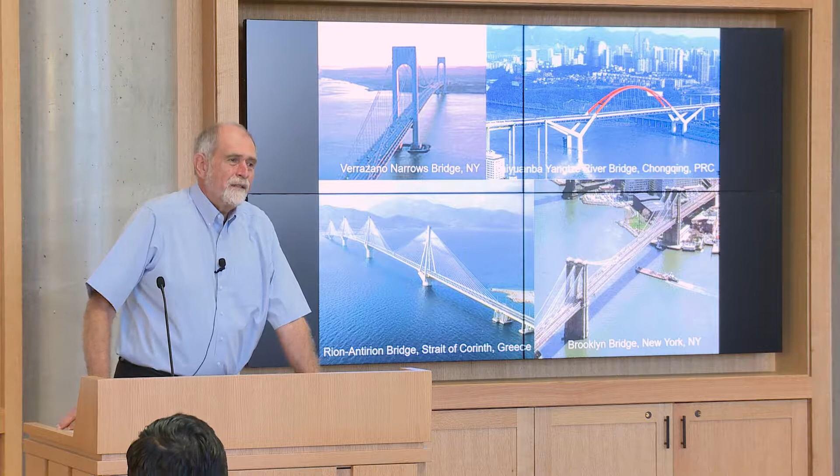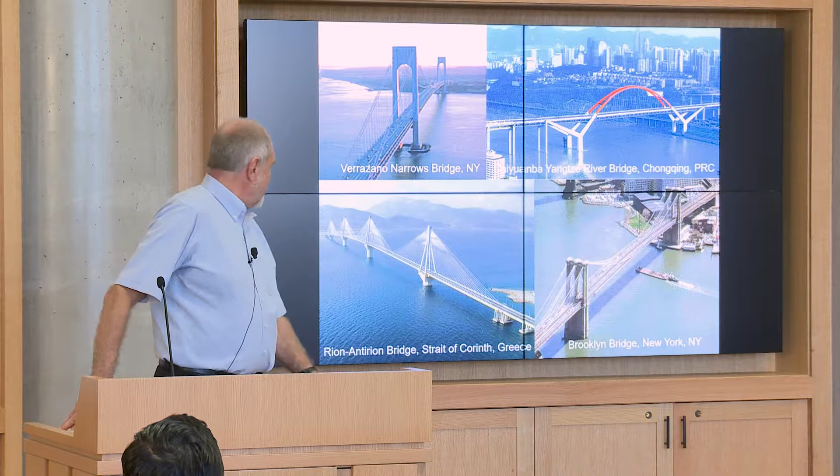So very quickly, I'm a structural engineer, I'm a bridge engineer, I'm a bridge designer. This is one of my bridges in Chongqing in China. But I have done my work all over the world. These are not all bridges I designed - I'm not that old, okay - like the Brooklyn Bridge down there. But I was the chair of the review panel that was put together to strengthen the Brooklyn Bridge against earthquakes and against terrorist attacks. And the same for the Verrazano Narrows Bridge on the upper left. And then we'll talk about the Rion-Antirion Bridge a little bit later, but I do bridge structures around the world, and in particular when there are seismic or terrorist issues.

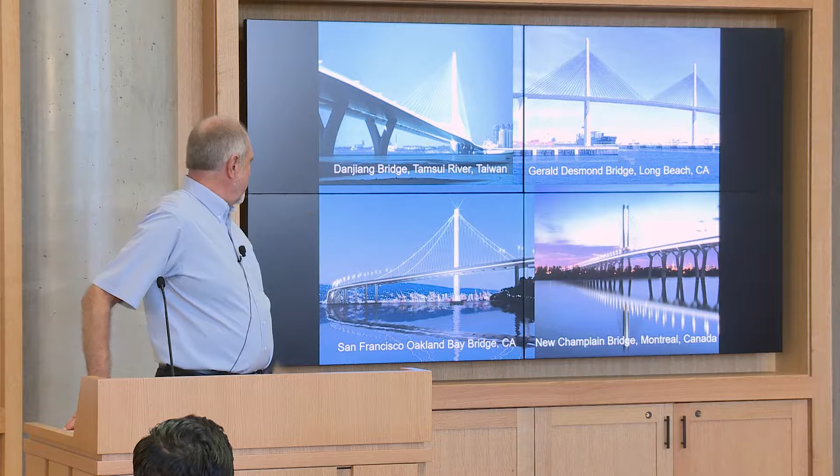Most recently, these are some of the bridges I'm still currently involved with. You can see all over the world in Taiwan, Long Beach, San Francisco, Canada. So this is what I do.

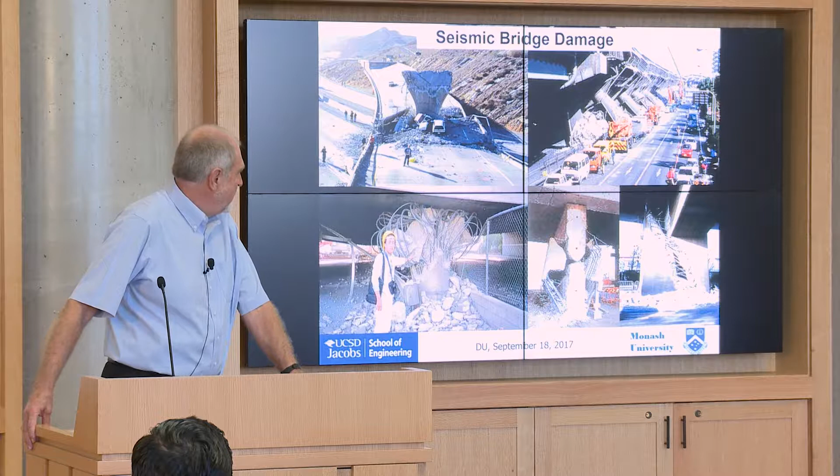Unfortunately, in natural disasters, our bridges can look like this. This is what I mean by designing against these kind of loadings that bring our structures to failure. On the left is 1994, the Northridge earthquake in Los Angeles. On the right is exactly 1 year later, 1995, the Kobe earthquake in Japan.

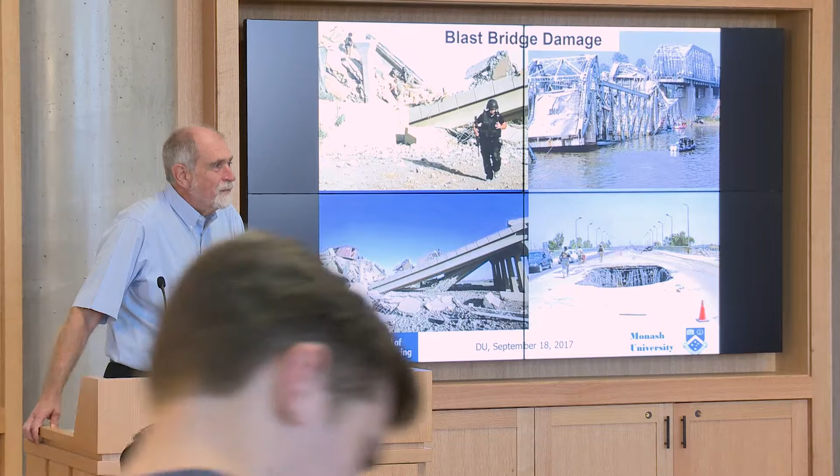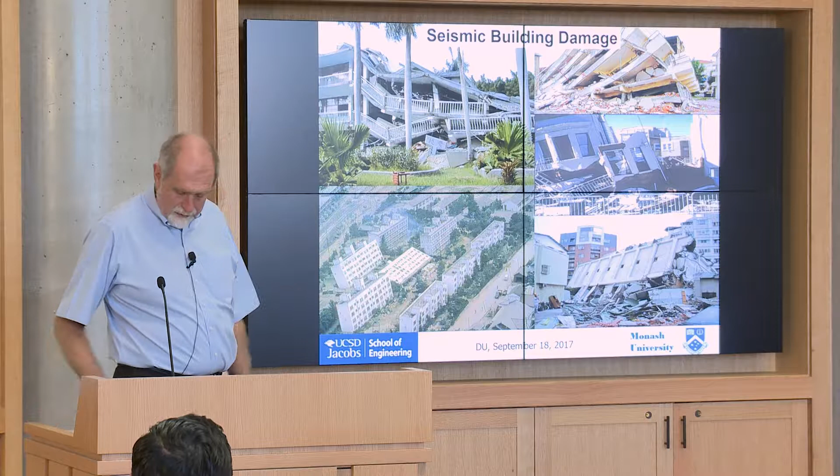We can also see the same kind of failure from blast loading, from terrorist attacks on our bridge structures. We can see it on our buildings from earthquakes. These are building failures from different earthquakes, but we can also see it from terrorist attacks.

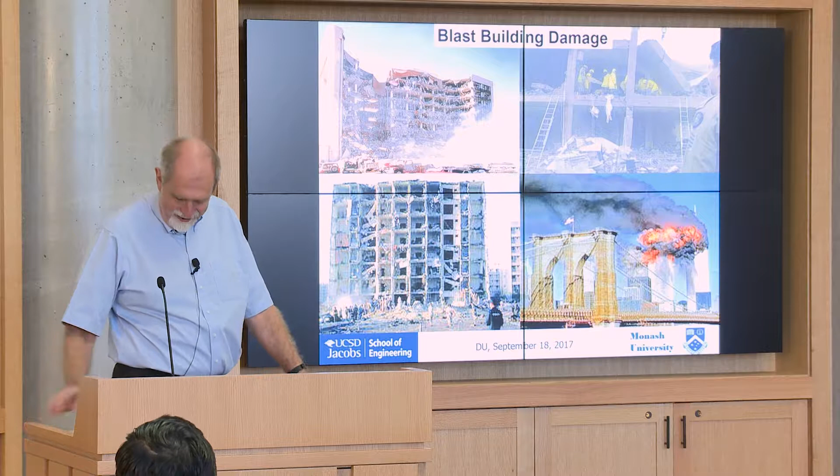This is really what I'd like to talk about today: how can we design for loads which we don't know what they really are? Ideally we have to decouple the response of the structure from the loading. That would be best, if any earthquake, blast load, or hurricane could be withstood, but unfortunately that's not the case. We can never do that.

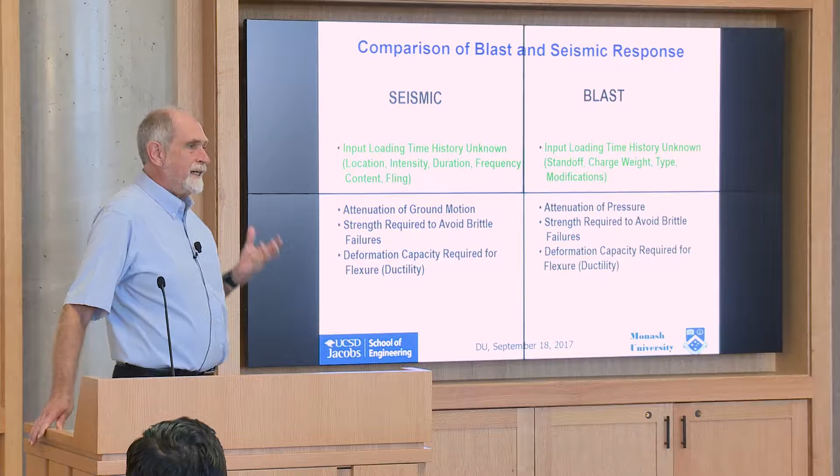Looking at the two load cases I want to talk about, seismic and blast, when we look at the input we need for design, the loading time history, we don't know the location of the earthquake, the intensity, the duration of shaking, the frequency content, or any special characteristics the earthquake may have. Same with blast loads, we don't know the standoff, the distance from the explosive to the structure.

We don't know the charge weight, how big the explosive is. We don't know the type, is it TNT, is it C4? We don't know if it's the modified explosives which we see on television regularly.

But I could just as well put up a slide with hurricane loads, because we don't know how far away from the epicenter we will be with our structure. We don't know beforehand what the intensity will be when we design, or the wind speeds which will hit our structure. So it's exactly the same thing.

For all these load cases, there's an attenuation of the effect. The best thing against earthquakes is to be far away, like here in Colorado. The further you are from the epicenter, the safer you are. In blast loads too, there's attenuation: when you're close you feel the full effect, when far away it attenuates. Hurricanes too, if you're not at the eye, it's not as bad when you're 100 miles away.

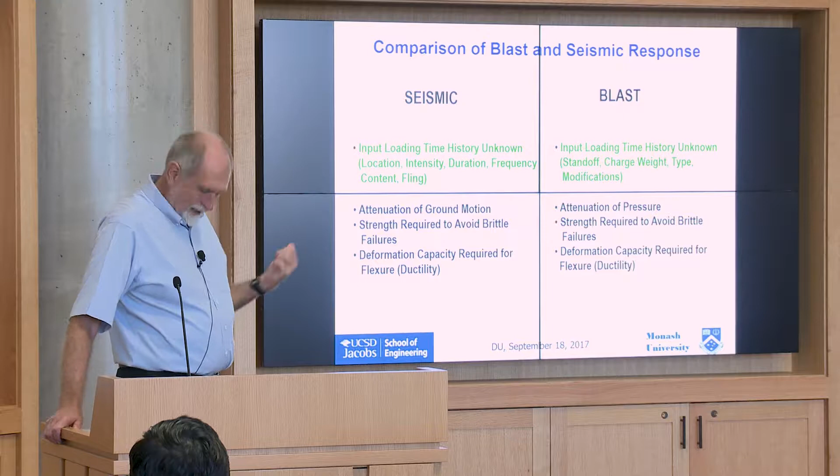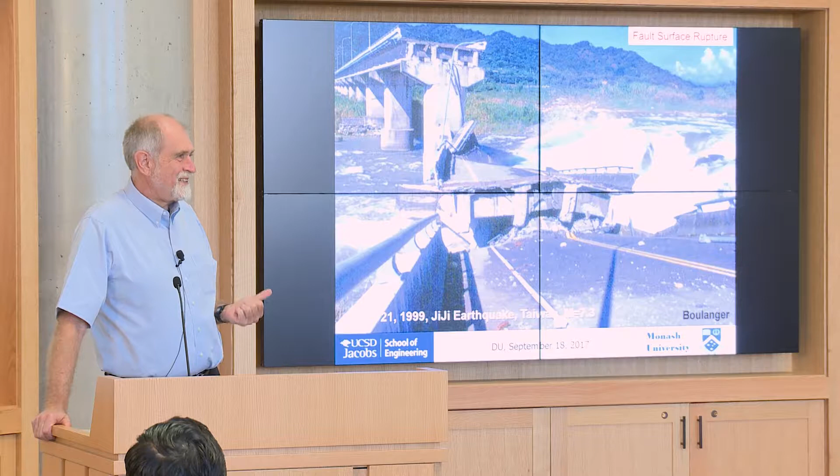But to design for these events, the best way is to look back and see what has happened in the past, because that's really the best way for us to learn. But it's a little bit like predicting the weather from yesterday. We can all do that, because we've experienced it, but predicting tomorrow's weather is more difficult.

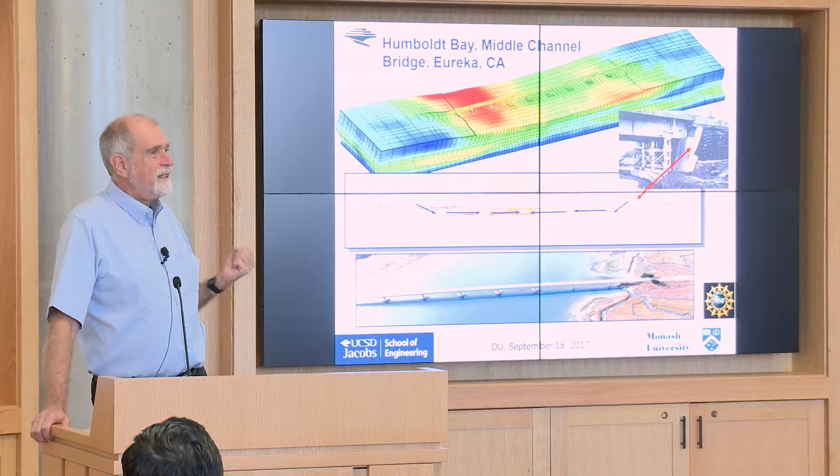You've seen this recently with the hurricanes. They always show on television these different models, the European model, the US model, and then 15 other models, showing the predictions. That's really what half of our business is about, trying to predict what happens in these known, unknown events.

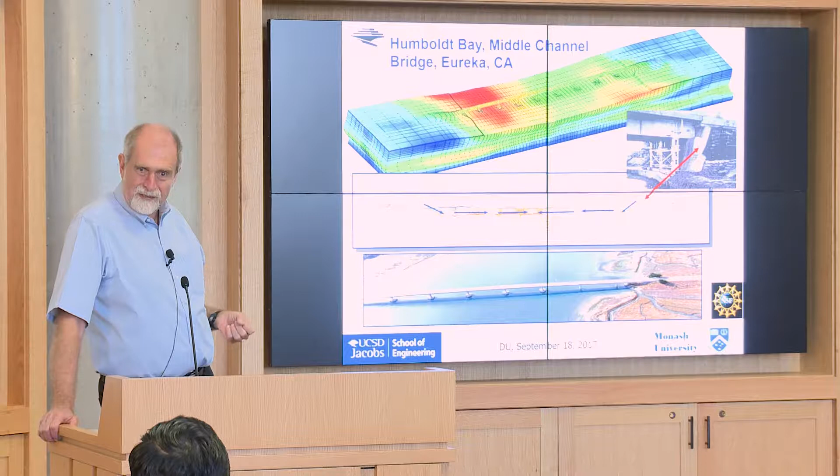So we do a lot of modeling. For those who deal with structural analysis and mechanics, it's a finite element mesh using elements for the whole soil condition, then the bridge structure is all modeled. We can send earthquakes through our analytical model, not just one but many different ones. That's how these hurricane models are also put together, sending all kinds of different assumptions through to get the most probable response.

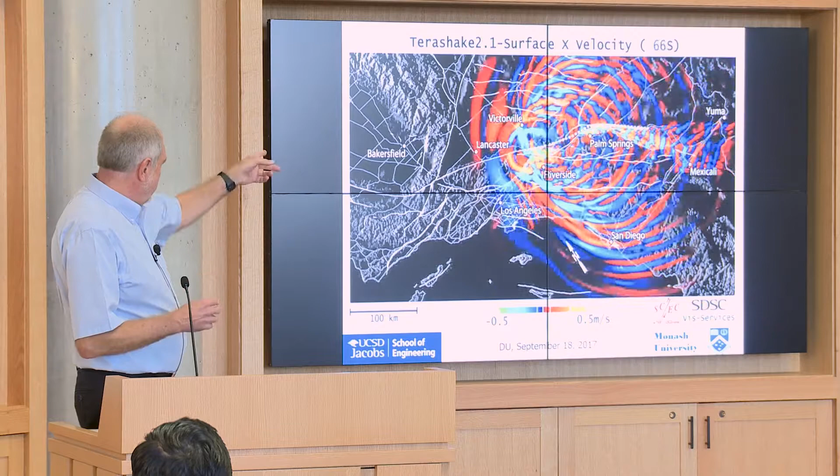So you can see here the intensity of ground shaking. These are the kind of things we can model these days. You can see the shaking spreading out from the San Andreas fault, and even after 80 seconds, after 100 seconds, you can still feel the ground shaking in the Salton Sea and in the Los Angeles basin.

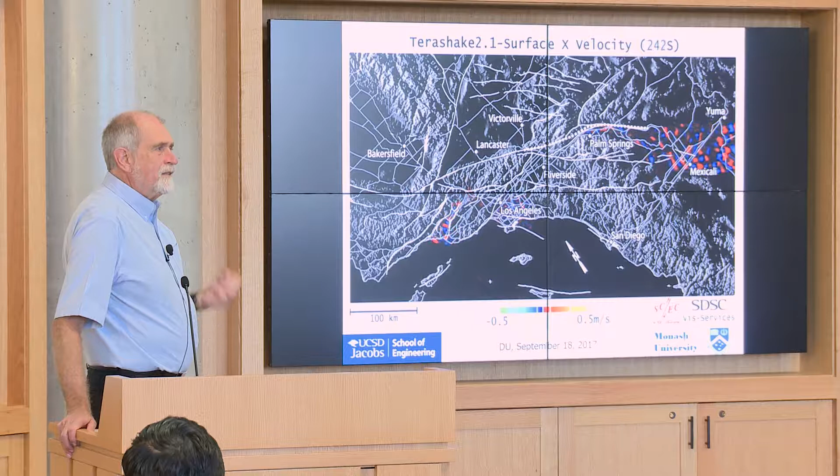This is very soft soil - like a bowl of jelly, the entire Los Angeles basin. Then in the San Fernando Valley, even 200 seconds after the earthquake, you still see ground shaking. These are the kind of models we can put together these days, and then we use that shaking input as the input into our structures to do the structural design.

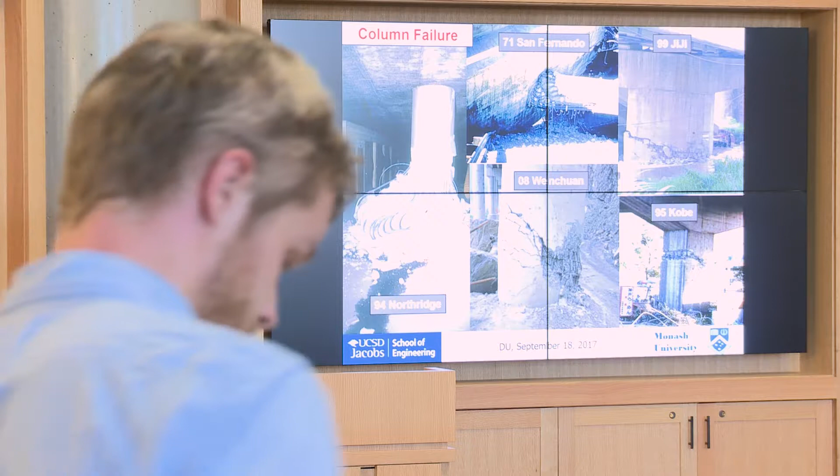So for example, bridge columns - this is where we see most of the damage in bridges in earthquakes. It doesn't matter when and where: San Fernando '71, '94 Northridge, '95 Kobe in Japan, '08 Wenchuan in China, '99 the Chi-Chi earthquake in Taiwan. The earthquake always finds the weak spot in our structures, and then the structures fail.

You can see here, for example, that all these columns have a lot of reinforcement along the column length and very little reinforcement horizontally, so it doesn't confine the concrete. We know now that our columns are susceptible to that. Before '71 San Fernando, we really didn't know that. So this is what we learned from past earthquakes.

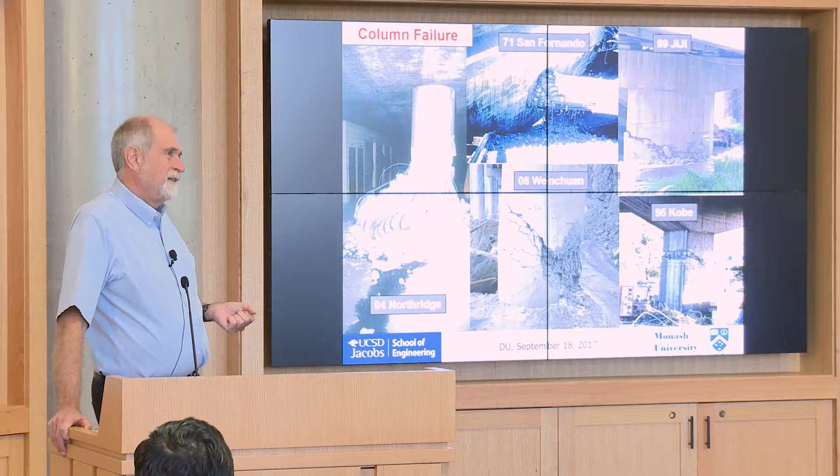So what can we do to our existing structures? We cannot just replace our whole bridge inventory from today to tomorrow, because we know that the bridges are not designed the way they should be. So we have to go through retrofit programs and retrofit our structures.

You can see here, in California we developed steel jackets which we put around all the concrete columns. When you drive on the freeway in California, you'll see steel jackets around all the columns, because that provides the horizontal reinforcement which we didn't put in the columns in the first place. We can do a lot of validation first in the laboratory - you see on the left a test in a laboratory on a full-scale shorter column.

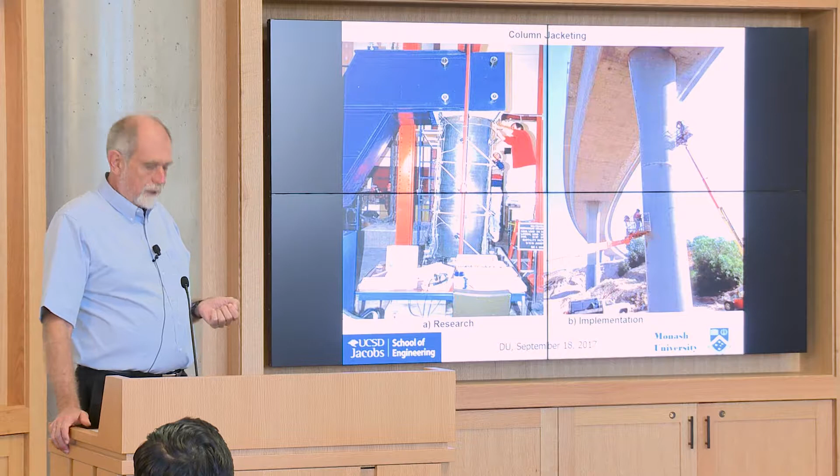Really this is what I want to talk about, because in the end it's not just the prediction, but the validation of the assumptions which we use in our analytical models. That's key for us to have meaningful predictions. For that we would like to have laboratories where we can test our structures full scale.

So we built in San Diego, at UC San Diego, the Powell Structural Research Laboratories. This was the first lab we built where we can test full-scale buildings up to 5 stories tall and bridges over 100 feet long, full scale in the laboratory. We have a 50-foot reaction wall on the back, a 50-foot reaction wall on the side, and then we use large hydraulic actuators to push the building into the deformation state it would see in an earthquake.

Okay, and then we measure the forces required to do that. We measure strains and all kinds of things. Typically, every structure has over 1,000 sensors put in, and those are the measurements we use then to calibrate our analytical models.

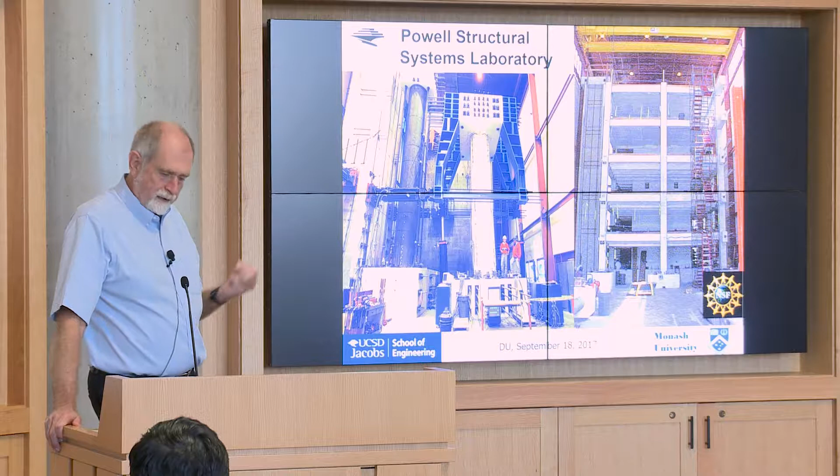So to do large-scale testing, there are three key principles which we need to follow. One, it should be done under controlled laboratory conditions, that we really get quality data. In order for us to validate analytical models, we need to have clean data, and so we need to measure parameters which we can then adjust in our analytical model.

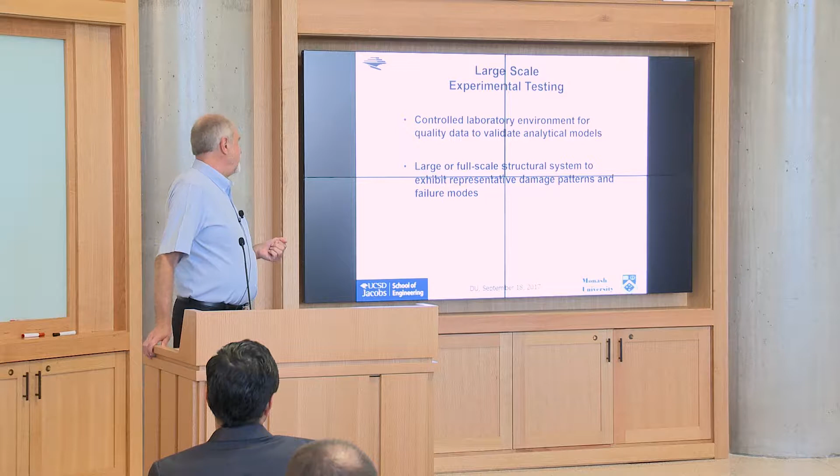The next thing we need to do is we need to test either at large scale or ideally at full scale, because that's the only way to get realistic damage patterns and failure modes. A lot of times we see structures being scaled down to little scale models, and they're being put on a shake table and sent an earthquake through, but you do not get the correct damage patterns and not the correct failure modes.

So, for example, concrete structures, you can only scale a certain amount, maybe a third or a quarter scale. Anything less than that, the reinforcement isn't there anymore. The aggregates in the concrete are getting too small, so you get completely different behavior. So you should test full scale, ideally.

And then the test should be performed under realistic load simulations with test protocols which simulate the actual demands. For example, testing bridge columns in the laboratory. Looking around the world, and we started out that way too in San Diego, you have a column, full scale, and you're happy that you can do that, and then you take the column, push and pull, push and pull, with larger displacements until the column fails.

And guess what? It's like the coat hanger effect. When you have a metal coat hanger, bend it back and forth, low cycle fatigue, eventually it breaks. We have never seen low cycle fatigue in a real earthquake, because you may get one or two large cycles, but not 50 or 100. And so then the test in the laboratory becomes meaningless, when you test with load input that doesn't correspond to the real world.

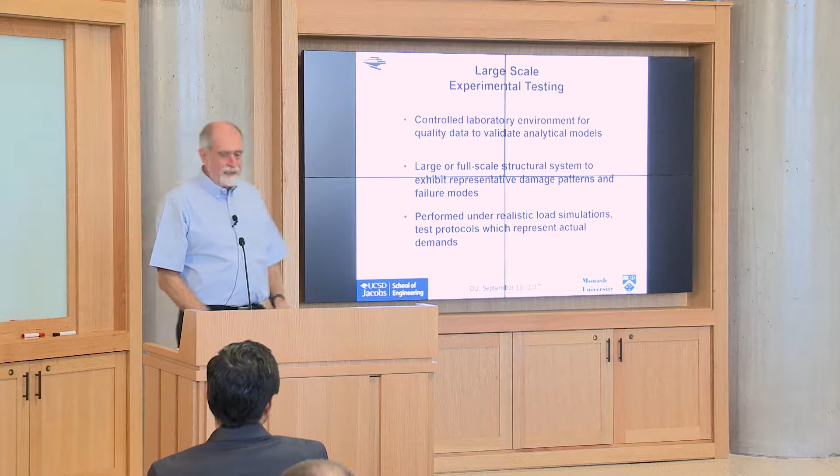So when you take these three theses and develop a research program around it, what that means is that you need a shake table where you can put full-scale structures, send real earthquake ground motions through. So we built in San Diego the world's first and only outdoor shake table, where we can put structures of 2,000-ton payload on that shake table. And we've tested 5-story buildings, 6-story buildings, 7-story buildings on the table, and we've reached about a third of the capacity of the table, so we can still test much, much bigger structures.

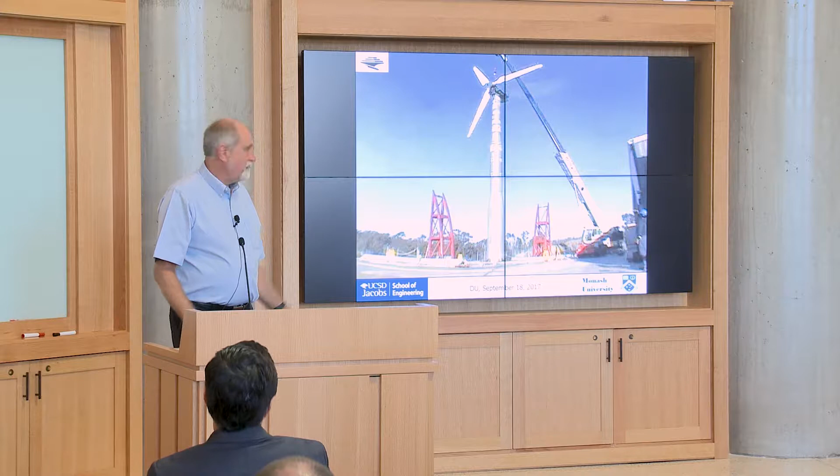So, for example, one of the first structures we tested was a windmill, 30 meters tall. When you test that structure, it's very easy to lift it onto the table with a big crane, bolt it down on the table, and send earthquakes through it. You can't do that at any other facility worldwide. Yes, we have big shake tables, but they're indoors, and you can never put a full-scale structure on these tables.

Or here, a 3-story parking structure. That's a precast concrete parking structure. And you can see our students have a lot of fun in San Diego. Or here, a 5-story reinforced concrete shear wall.

What happened to the sound? Well, doesn't matter. So you can see here how the building is shaking, and then when you take close-ups with the camera, you can see how every crack opens and closes, like the building is breathing under the earthquake load.

Let's take a look at bridges. This is the Coronado Bridge in San Diego, and it was built in the late 60s, '68, '69, clearly to seismic standards which are different from the ones we have today. And then when we went back to our seismologists in terms of what we can expect in the Coronado Bay in terms of earthquakes, they told us there's something called the Silver Strand Fault.

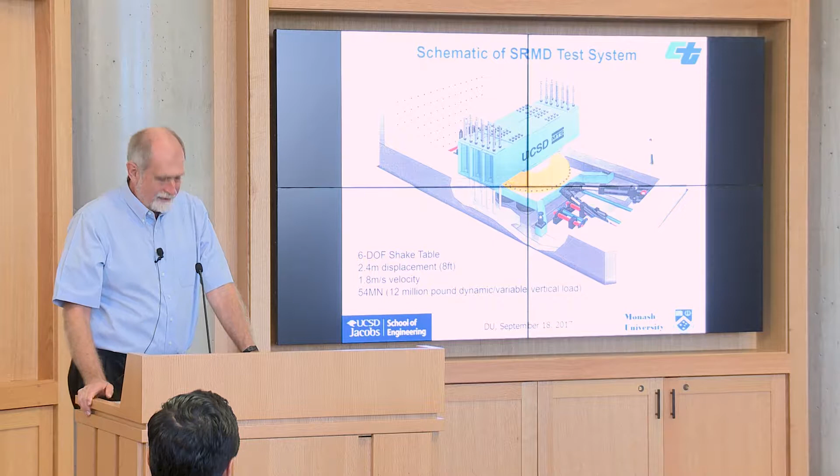In order to retrofit the bridge like this, Caltrans said, this is a great idea, but how do we know it's working? So we had to design a separate laboratory for these kinds of tests, namely a seismic response modification device system that can take these devices through very large displacements, 8-foot displacements, with loads up to 12 million pounds on these bearings. Here's a schematic of the test setup, and this is one of these bearings in the test setup.

So you saw 100% deformations, namely the height of the bearing applied horizontally. These bearings can go through 300% deformation before they fail. This is the retrofit of the Coronado Bridge: the earthquake comes and shakes, or even if we have a fault rupture, the pier goes there and shakes over there. This is how we decouple the structural response from the input. So even if we have a bigger earthquake, I'm not worried about it, it will be fine. I don't really care anymore what the earthquake is in San Diego for the Coronado Bridge.

Now we come to the Rion-Antirion Bridge, the world's longest cable-stayed bridge, over 3 kilometers in length. The initial design was that each pier connected the superstructure at the pier, with hinges between the individual spans, but it became a very flexible system. I was responsible for the seismic design of the Rion-Antirion Bridge across the Gulf of Corinth in Greece.

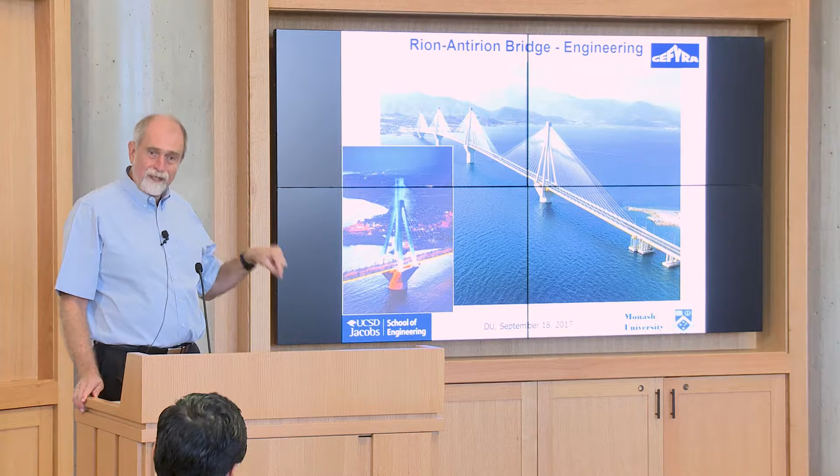Very similar to California, we can expect the same magnitude earthquakes in Greece, and we can also expect fault ruptures and offsets. So the idea was not to isolate the bridge with bearings, but to just hang the bridge from the supports and let it float freely between the towers. The towers have 4 legs, and the bridge is just supported by the cables, not connected to the tower. It's the same idea, just reversed, hanging down, and isolated from the seismic input.

To do that, we connected the whole bridge end to end without expansion joints. Usually you have expansion joints every 300-400 feet—that's what you hear when you drive across a bridge, that ka-thunk sound. Here we needed expansion joints only at the ends of the 3-kilometer-long bridge, with a 1.5 meter expansion joint on each side.

So the whole bridge is free floating end to end, just supported by the cables. But then we put dampers in—like shock absorbers in a car. These are oil-filled dampers which dampen any relative motion between the tower and the bridge superstructure. These huge blue dampers, shock absorbers, were put in the bridge at every pier.

But again, dampers of that size had never been built in the world or tested before. We in San Diego could put them in our seismic response modification device system and test them under simulated seismic loads.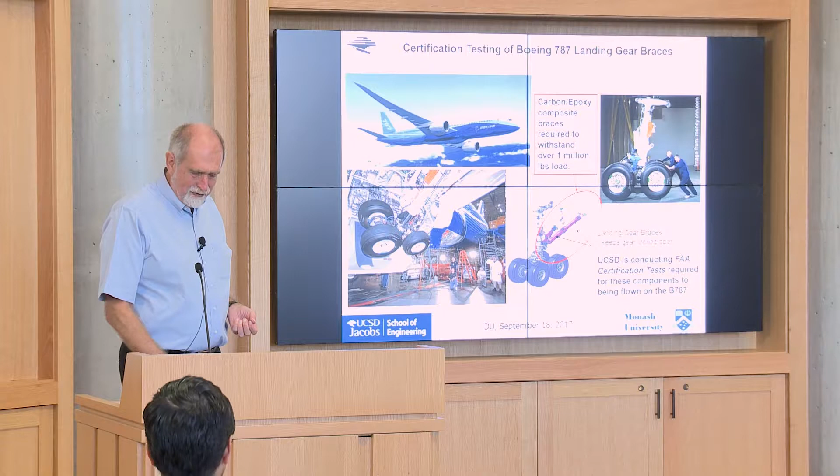Now the other thing we did with that same loading system has nothing to do with bridges, but with the 787 Dreamliner, because it has an all-composite landing gear, carbon composite landing gear. This strut, the landing gear brace, was never tested to failure and couldn't be tested to failure anywhere. So Boeing came to San Diego and asked us to test the landing gear for the 787 Dreamliner. You can see it in the test setup. It performed beautifully—this white element is all carbon composite. It's the first time a landing gear is not built out of steel or high-strength aluminum, but out of carbon composites for weight purposes.

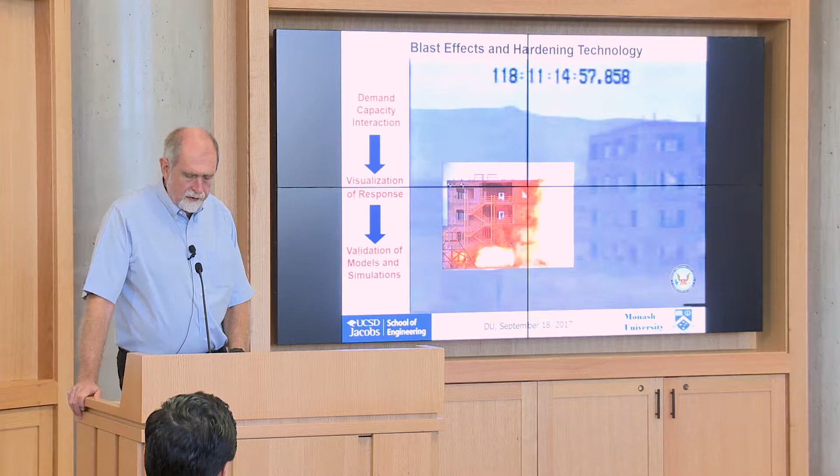Let me now focus on terrorist attacks and blast loading on structures. This work was done with the DTRA, the Defense Threat Reduction Agency. They have a test stand at White Sands in New Mexico, at the Trinity site at Ground Zero. This is where the big test site is, where we can build 4-story full-scale buildings and do real field blast tests to find out how we can strengthen our buildings against blast loads. This was one of the first tests, on a reinforced concrete frame with masonry infill.

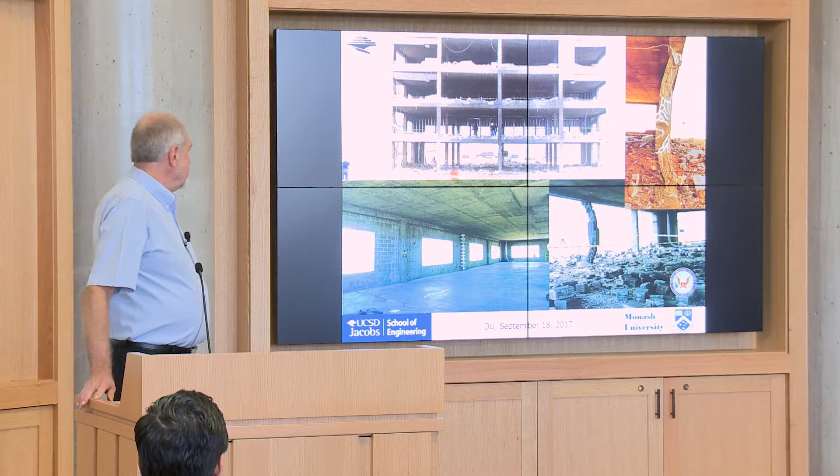You can see the building is still standing. The target was the center column in the middle on the ground floor. You can see how deformed it is in the two right pictures. On the left, you see what the building looked like before the blast load - a concrete frame with masonry wall infills. While the building is still standing, the masonry walls are blown clear through the building. Unfortunately, in this case, even though the building is standing, everybody in the building would be dead.

So we have to think about several things. One, how can we keep the building from collapsing? That column is very close to gone, and when we take out that column completely, the building may collapse. And then, how can we keep these masonry walls in place so they don't fly through the whole building?

So we developed, again in San Diego, hardening systems using carbon fiber wraps around our columns. We developed that first for earthquake loads - just like we put steel jackets on, we can also wrap our columns with carbon. And it worked really fine, and this is why DTRA came to us in San Diego and said, look, you're doing the seismic retrofit, which seems to work really well - can you do the same for blast? And naturally we said, oh sure we can, you know - no idea what we were talking about at the time.

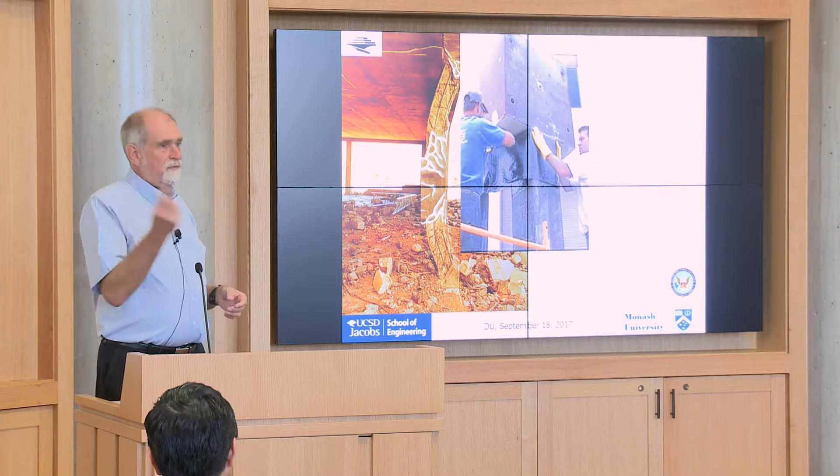So we wrapped that column, that same column - it was rebuilt. The whole building was rebuilt, all the infill walls were put in, and that column was wrapped with carbon fiber. Then the same test with the same charge load was repeated. This is what the column looked like after the test - perfectly straight. You can see just at the very top, the carbon jacket opened up. So that was the first indication that retrofitting or hardening of structures using carbon fiber confinement could be very effective.

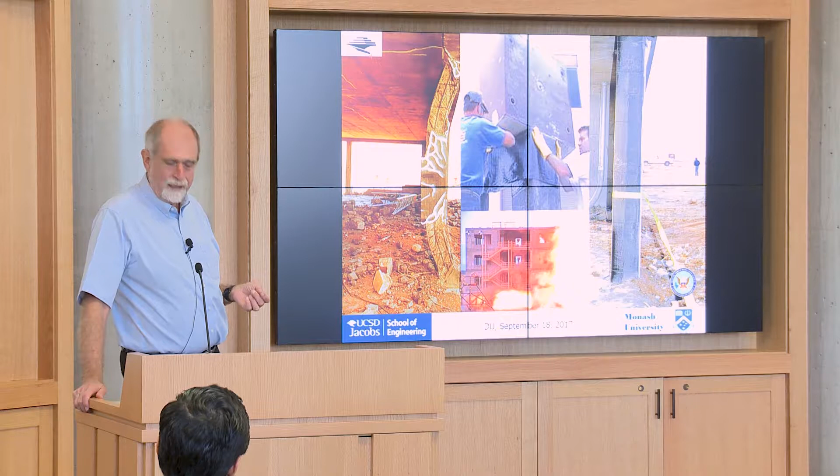At the time, we had no idea how many layers of carbon we needed, so we developed a whole test program. We developed a separate column test stand at Kirtland Air Force Base in Albuquerque, New Mexico. On the left, you see real field blast tests again - a column that has not the retrofit, an as-built column. On the right, a column that has a carbon jacket. Again, the column on the right is almost perfectly straight, while the column on the left shows the typical failure modes we would expect in a blast load case.

We did numerous blast tests at field tests in Albuquerque, but several times we couldn't do the test. You fly out to Albuquerque and then you're told, oh, there's an inversion layer and that's why we cannot test today. Then you fly back, and as soon as you're back in San Diego, they tell you, oh, you can test now. So you have to fly back.

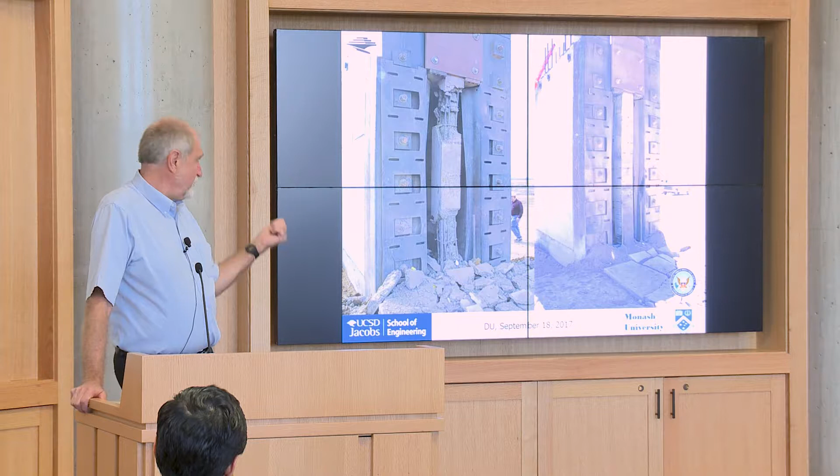And the other time where we went out there was on 9/11. We were in the hotel in Albuquerque when we saw the World Trade Center being hit. Then we went to the Air Force Base, and they already had armored vehicles out there pointing machine guns at you, so we were out of here, back to San Diego.

We wanted to test these columns in San Diego, not in New Mexico. But unfortunately, they didn't allow us to use explosives on campus. And I don't know if they would allow it here at Denver University.

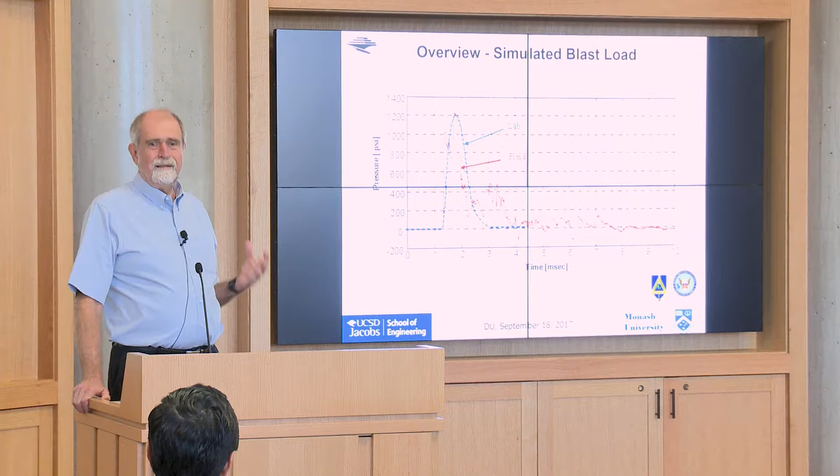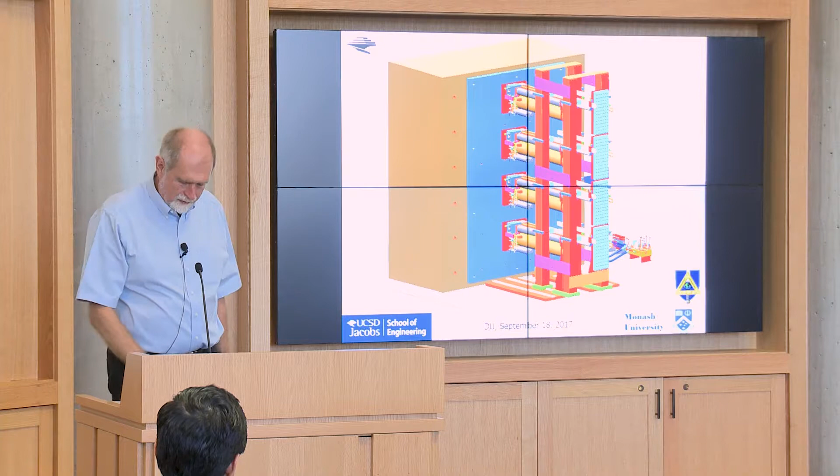So we decided to build a test setup, the world's first blast simulator, where we simulate blast loads in the laboratory using servo-controlled hydraulics instead of real blast loads. Here's the schematic: four servo-controlled hydraulic actuators with red steel plates on front, and turquoise elastomeric pads which impact the column with an impulsive force and then pull immediately back. You can program these actuators to have different force distributions, not just uniform, whatever you want. So this is the first test in that blast simulator.

1, 0. And you can see the same damage patterns which we saw on the columns in the field blast test in Albuquerque.

The real value comes in when we use high-speed photography on these blast tests. In a real blast test, all you see is the fireball. You don't see what happens to your structure. Like in the first blast I showed you on the 4-story building, you just saw the fireball, and then you have to wait until the dust settles to see what happened. For analytical models, we would like to see exactly what happens during the blast, how the cracks develop and how the concrete spalls off.

And when you look at that, yeah, that's working. This is on a masonry wall, unreinforced masonry. The impact was captured with phantom cameras at 20,000 frames per second. Now you can see how every piece is falling apart, and this is how a masonry wall, just like in the 4-story building, would fly through the whole building. We do analytical models to simulate this.

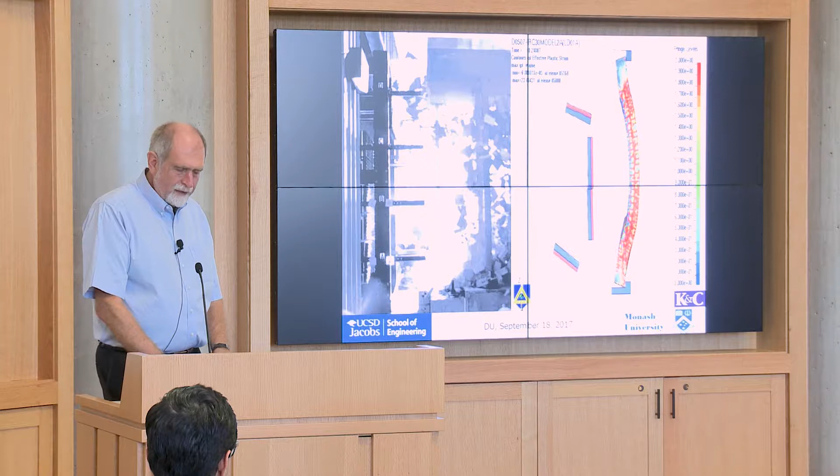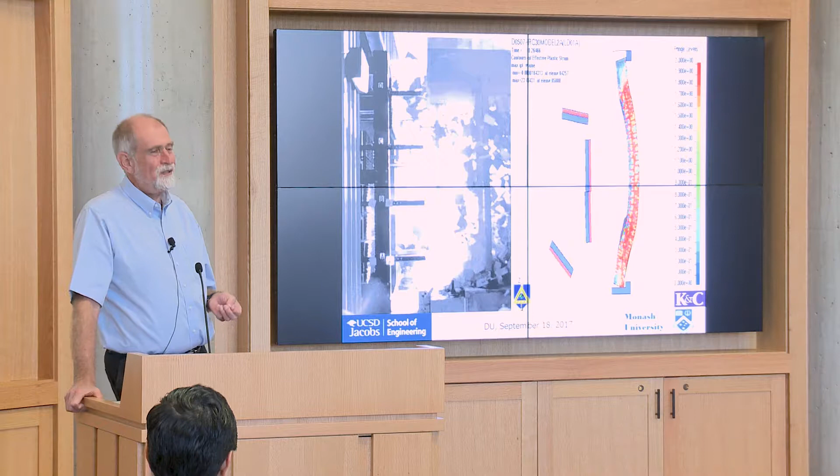Since these are full-scale tests, you never do 10 or 20 of the same kind—you typically do just one. And a one-of-a-kind test is statistically absolutely meaningless, unless you have an analytical model which you use to predict the test and then validate afterwards with the test results. So here you can see the masonry wall.

As a first solution, we sprayed it with polyurea on the back, on the inside. Polyurea is the same stuff you use for truck bed liners, a spray-on foam. There we go—you can see how the wall deforms and the polyurea holds the wall together. But unfortunately, you can see at the top and bottom it also pulls off the ceiling, pulls off the floor, and the whole wall still comes in.

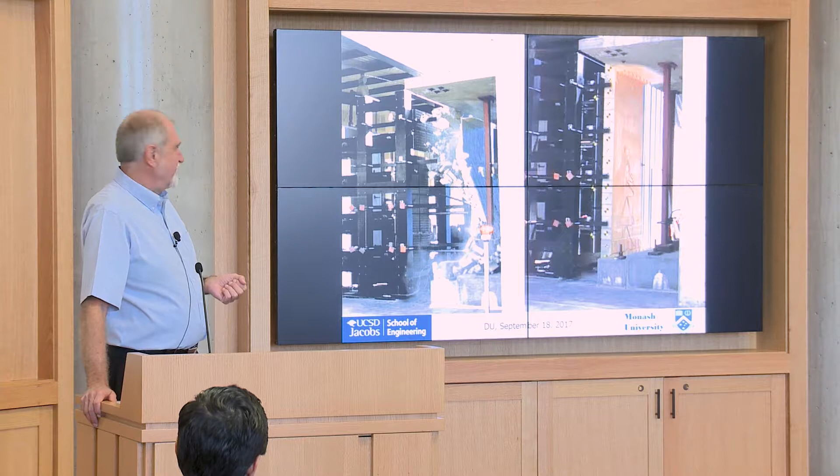And that will definitely kill you when it comes at you as a single piece. We saw the same with hardening of windows. I was involved in hardening a lot of our embassies worldwide, and all the windows in embassies have a mylar film on top, because when the window gets hit with a blast load it would fracture into millions of pieces and hurt you. So we put a mylar film on the window so it stays together. But the problem is it stays together as one big piece and comes flying through the room, definitely killing you.

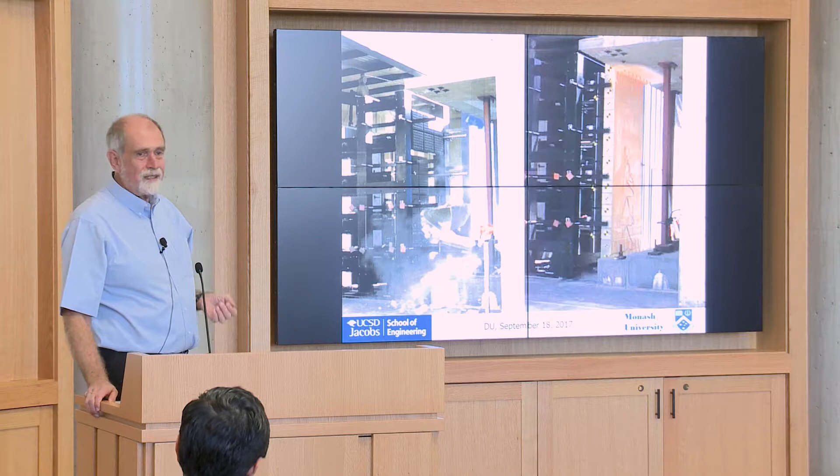So we had to design, for the Defense Threat Reduction Agency, systems that catch the window. For example, you put a steel bar in the middle of the window, and then the window comes and folds around it. Very similarly here, we had to come up with methods to catch the whole wall. So on the right, we have dowels into the ceiling, and then ductile connectors—just steel straps, Simpson ties basically—that elongate when the wall comes in.

There you can see the wall with the ductile connectors at the top. You can see the deformations of the wall, and it stretches at the connectors at the top, but the connectors hold it back. In the picture you see pieces flying around, but in a building you couldn't have that—you'd have the columns and the wall. Overall, the wall stays in place and doesn't fly through the whole building.

Okay, let's look at bridges a little bit more broadly. You can see here the San Francisco Oakland Bay area with the Golden Gate in the back, the Oakland Bay Bridge, and then the new San Francisco Oakland Bay Bridge at the very bottom. That's what I want to focus on a little bit more because it's a unique structure.

Overall, we have 24,000 bridges in California, and we spent in the last 20 years about $16 billion to harden or retrofit our bridges against earthquakes and against terrorist attacks. All these hardening or retrofit technologies are based on the work which we did in our laboratories in San Diego. And then we have something called the Caltrans Seismic Advisory Board.

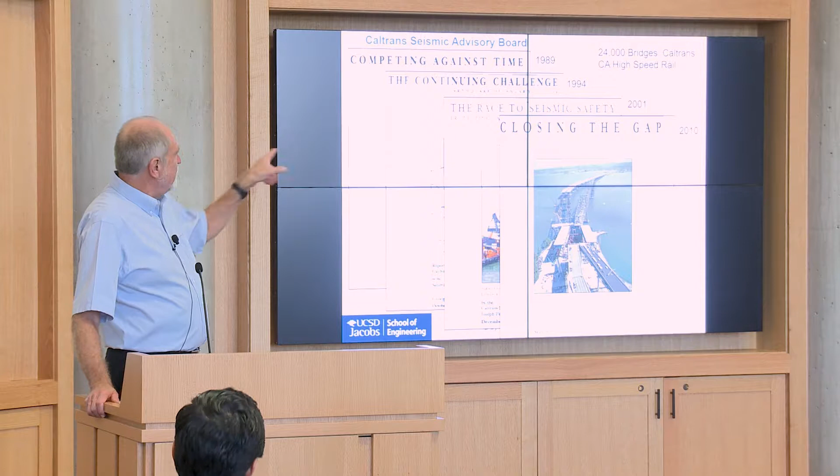After the '89 Loma Prieta earthquake, we wrote a report, Competing Against Time, to assess why bridges failed. Then in '94 Northridge, we had again damage of bridges, when we wrote the report The Continuing Challenge. And then we didn't have any major earthquakes since, and people are becoming complacent. They say, oh, we don't need to worry about it, we don't have a big earthquake. It's just like when you don't have a big hurricane for a few years, then you become complacent. So we wrote interim reports, The Race to Seismic Safety and Closing the Gap, and now we are just working on another report as we speak.

So the San Francisco Oakland Bay Bridge, the new one, is a very interesting structure, namely it's a self-anchored suspension bridge. What does that mean? In a typical suspension bridge, you build the towers, and you build the big anchorages at the end. You put the cable over the towers and anchored at the end, and then you pull the steel segments, the superstructure, up individually and connect it. Here you don't see any big anchorage at the end of the bridge. So it's a self-anchored suspension bridge. The cable coming from the tower wraps around the end of the bridge, and goes up on the other side, and then it's anchored again in the bridge itself.

So the question is, how do you build a self-anchored suspension bridge? We'll come to that a little bit later. But you see in this picture here, this is the reinforcement which we have in some of the piers. You can see now the difference from some of the columns we saw in earthquakes before. Now we put horizontal steel in, confinement steel, so we don't need the steel jacket on the outside, we have it on the inside. But now we have a different problem, because the contractors come back and say, you put so much steel in your design, we cannot build it anymore.

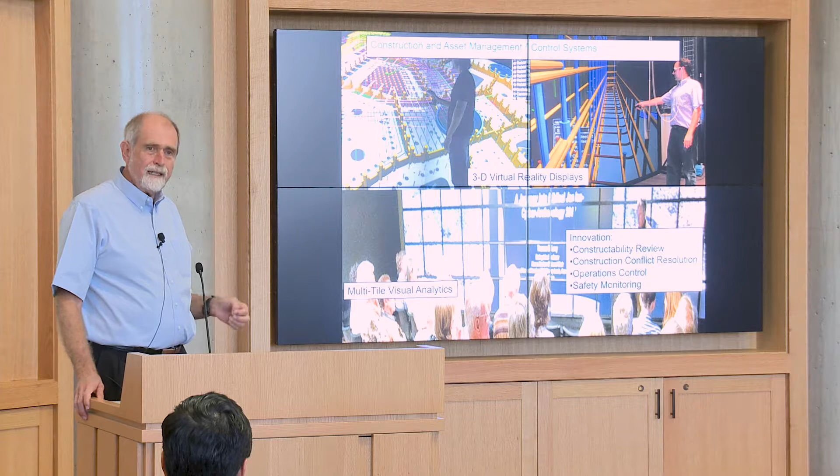But the net result is that your whole bridge deck is under a very large compression force. Namely, the full cable force is anchored in the bridge deck, so it goes through the bridge. So it's a closed force system.

But the problem was that somebody made a comment on television, one of our learned colleagues from academia, that this bridge would collapse because of this big compression force if there's just a small blast load on top of the bridge. If you punch a hole in the bridge, it would buckle and collapse in itself.

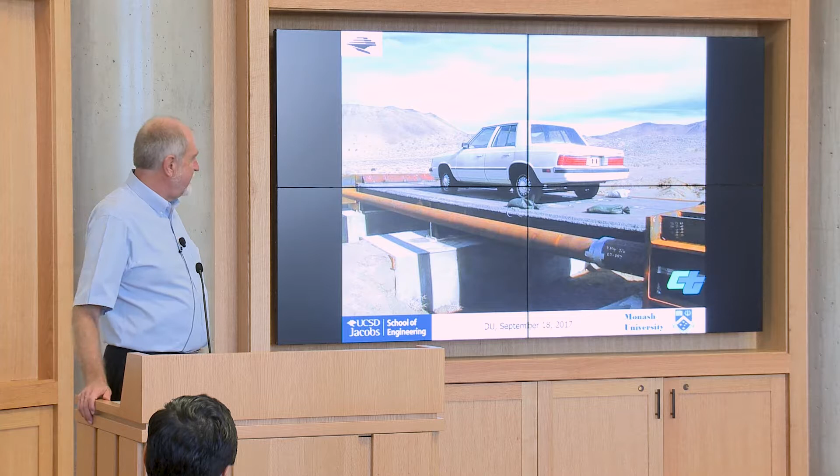We built one, overlaid it with 2 inches of asphalt concrete, just like the real bridge deck. Took it out to China Lake Naval Air Station, pre-stressed it, put the preload on with pre-stressing cables on the side, put a K-car on it, loaded the trunk with 4 boxes of flake TNT, and then tested it. 4, 3, 2, 1, mark.

And that was the result: just a small hole in the bridge deck, about 2.5 to 3 feet in diameter. The deck did not buckle, it was still there.

So the most common explosive threat you can think of -- clearly I can always imagine a bigger explosive, as I said before -- but the most common one would be a car where the trunk is loaded with explosives. So the bridge definitely would not collapse.

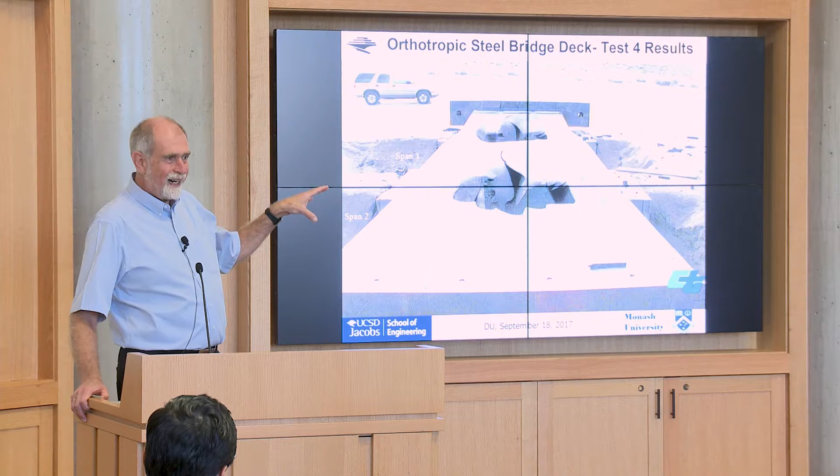So we did another test on the same deck. Two tests in a row, same failure mode. This data is archived at Caltrans. It's not really public knowledge, but they will pull it out when somebody comes and asks them, are you sure there's no danger of terrorist attacks on the Bay Bridge?

We then did further tests on all kinds of different bridge decks, concrete bridge decks, not just the orthotropic steel deck we had. This time we didn't use K-cars anymore -- we didn't have enough cars -- so we just built a little stand with the same standoff distance as would be in a trunk, and used C4 or plastic explosives, with different charges of 25, 50, and 100 pounds.

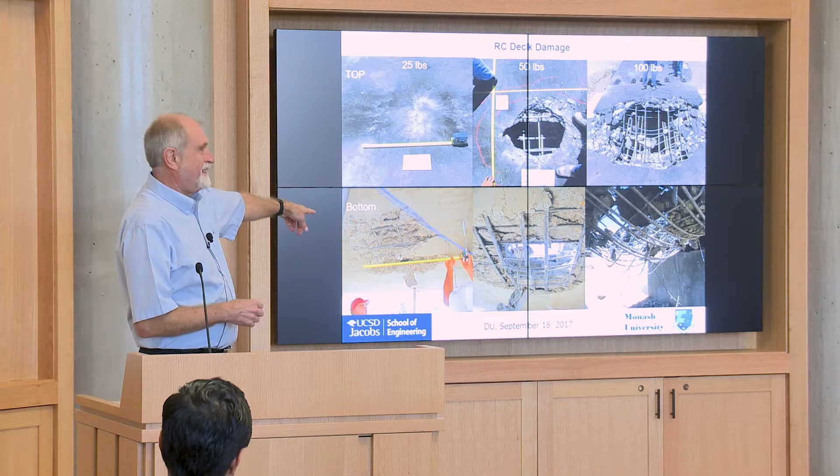You can see the damage here, and the interesting thing for those who don't know concrete behavior is that at the top you see less damage than at the bottom of the deck, because concrete is only a compression material -- it's good in compression. So at the top you see just discoloration with 25 pounds, while big chunks are already pushed out at the bottom. At 50 pounds, the hole at the top is smaller than at the bottom, and so on. This is the kind of database we established experimentally.

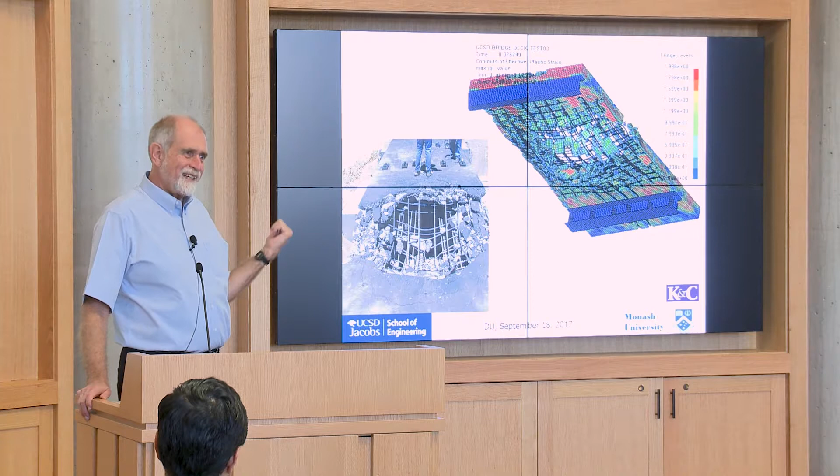And then we developed analytical models which show exactly what we did experimentally. It's always easy for a good analyst to predict the weather from yesterday. So you can see here that it looks just exactly the same after we did the test.

Let's come now to some of our more landmark structures, because terrorist attacks typically are not against our common structures, but against landmark structures. We had several threats against the Golden Gate Bridge and against the Verrazano Narrows Bridge.

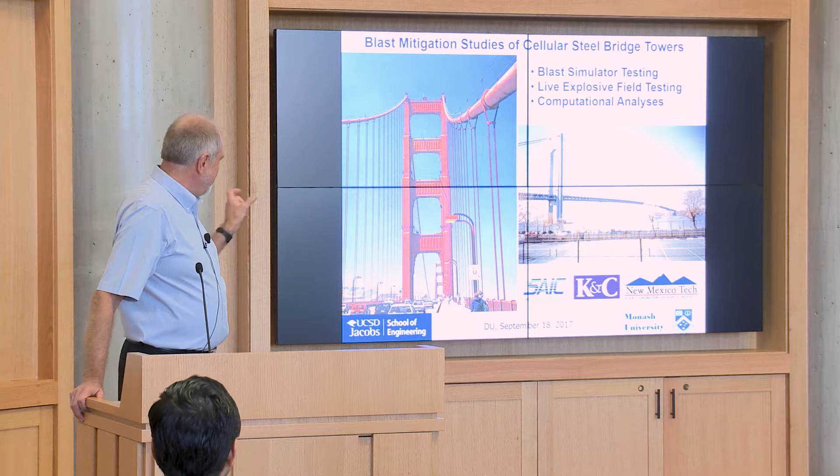What can you do? The biggest defense against bomb blast, as we discussed at the beginning, is to have the standoff. The further you're away from your blast load, the better. But on a bridge, you cannot have a standoff, otherwise you would have to close all the lanes for traffic. So it's very difficult. We have to deal with close explosive blast loads against these bridge towers.

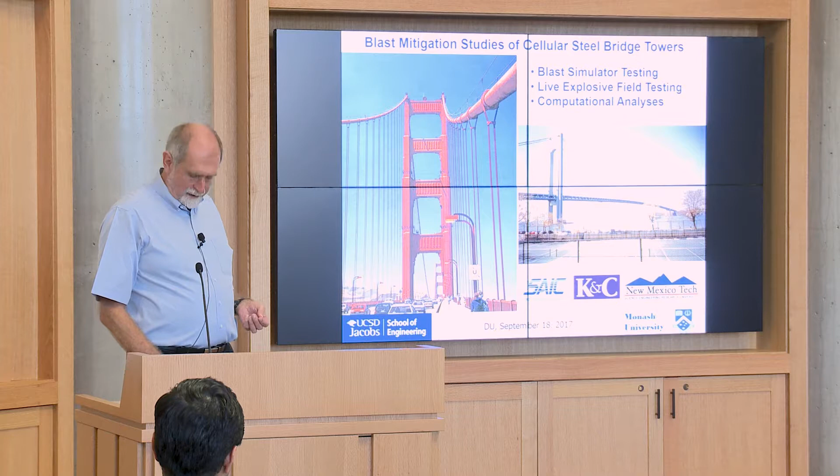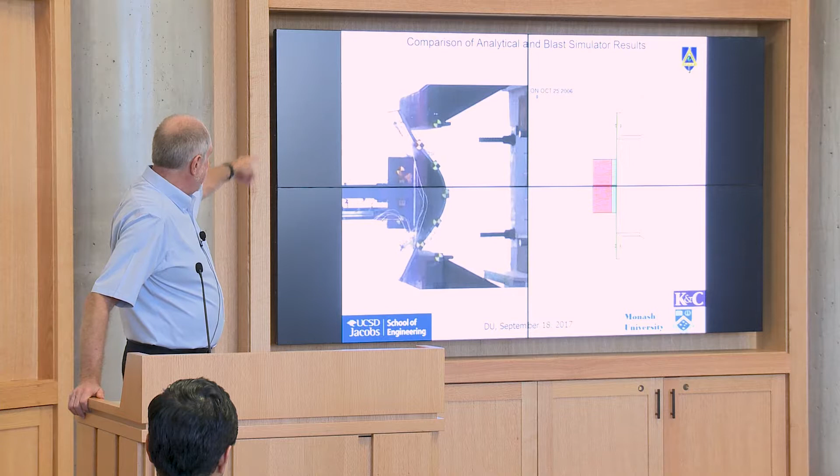The first thing is we took a 6-inch steel plate, just like the thickness of these tower faces, and put it into our blast simulator. You can see here how that fails, how the bolts are being broken, and the steel plate deforms. And again, we can develop analytical models which in the end show the same.

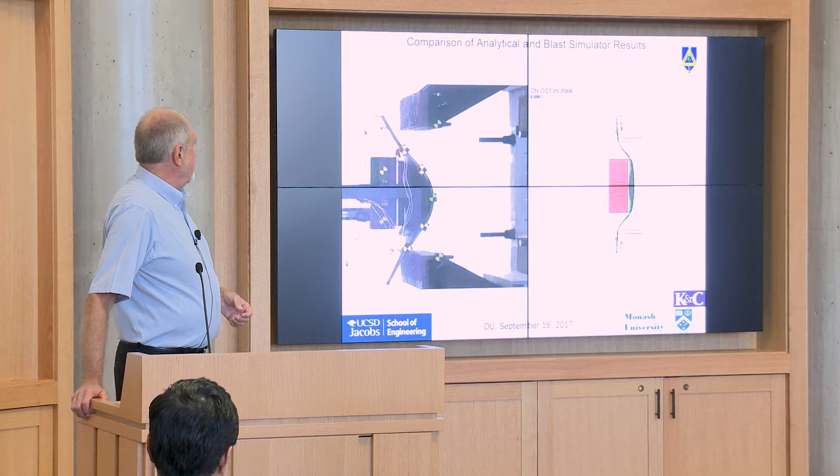But it's not just this one single steel plate, we have these multi-cells. So we did a lot of analytical simulation, not done just by us in-house, but by some of the big companies that do blast analysis. They showed us examples where the blast hits the first cell, then it fractures into lots of little fragments that act like projectiles and damage the second cell, and the next cell. And the only question I asked is, how do you know that these are these small little 2 by 2 inch pieces? The answer I got was, well, this is the discretization I used in my model, the finite element mesh.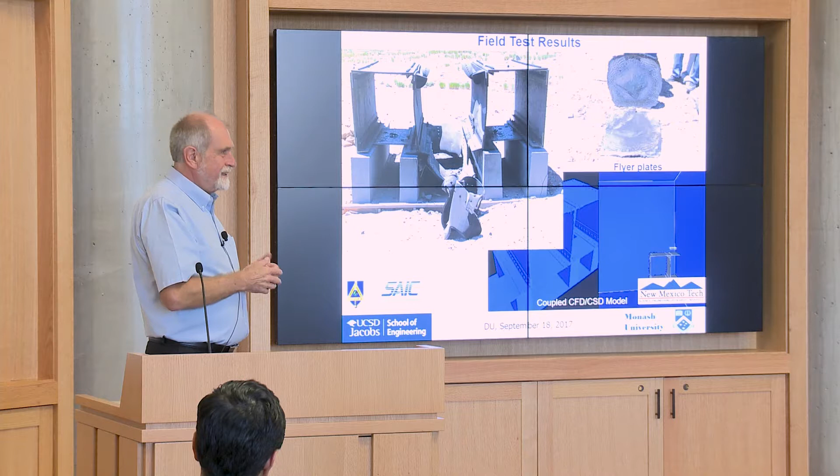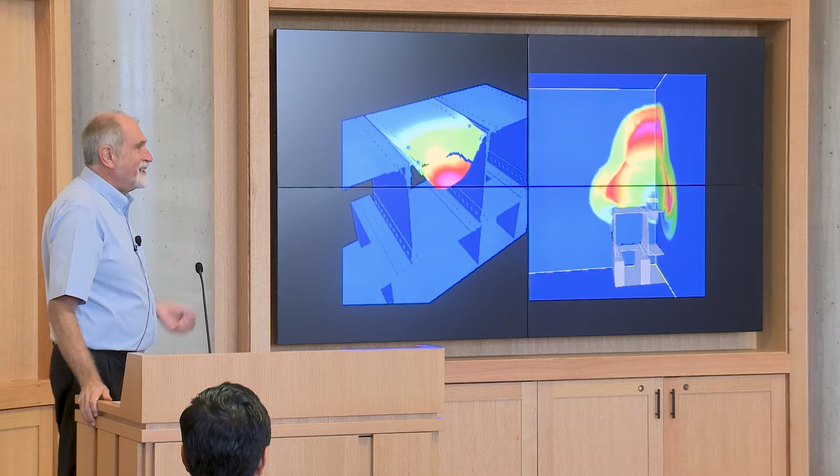We were very surprised to see these results. Yes, we only saw damage in the middle cell where the blast load was, but you see on the right these big pieces of steel that were cut out, and the hole on the left. So we term them flyer plates, because these plates are cut out and fly into the next cell, cut a hole, fly into the next cell. It's a bit similar to our building with the walls, where you put something behind and you get a big piece. So here we get flyer plates, and after we saw that in the test, we could model it analytically too - these flyer plates develop and poke a hole in the next cell.

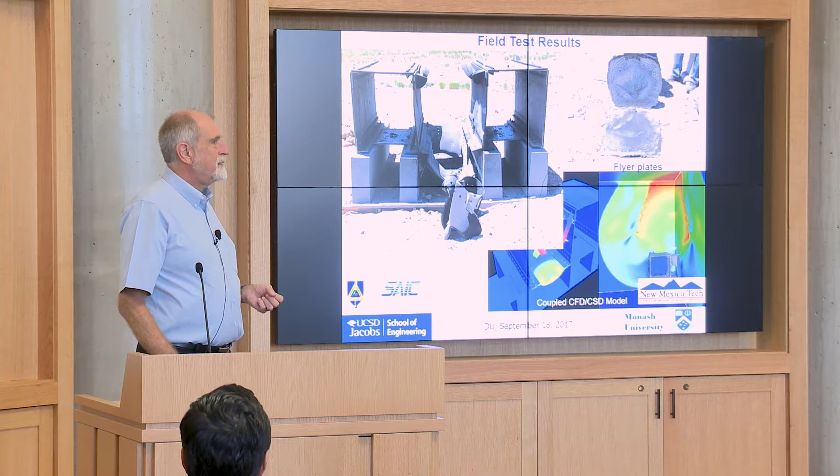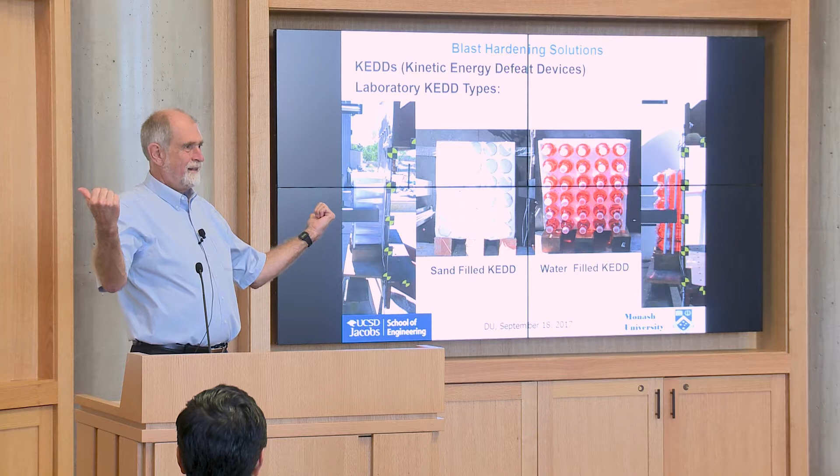So what do you do against this kind of failure behavior? We developed what was called KEDDs, or kinetic energy defeat devices. What is that? You can see on the left just little polymer tubes filled with sand, and on the right, water bottles - we filled it with red water so you can see it better. The whole idea is to divert the energy. With sand on the left, it will go straight through. With the water bottles, they break and the energy goes partially off to the side.

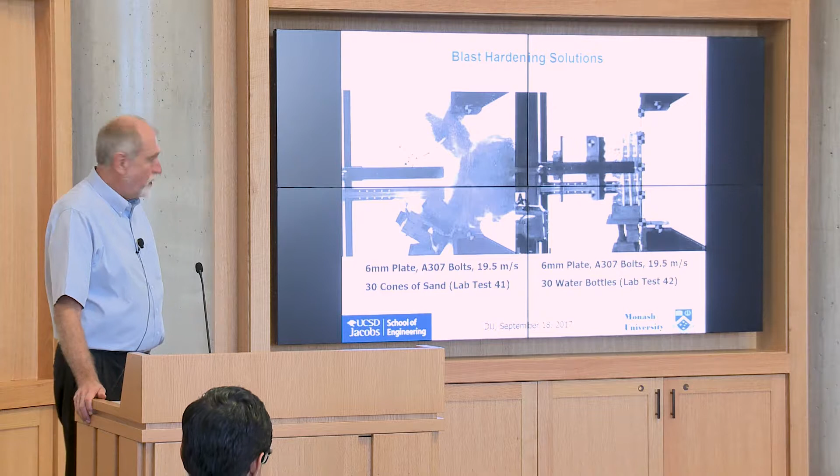Here you can see the test with the sand-filled ones - it goes straight through and the plate is pulled out. Then on the right, you can see the test with the water bottles, and you can see the energy going to the side. The plate was still in place after the test. So that simple principle was then translated into the real case.

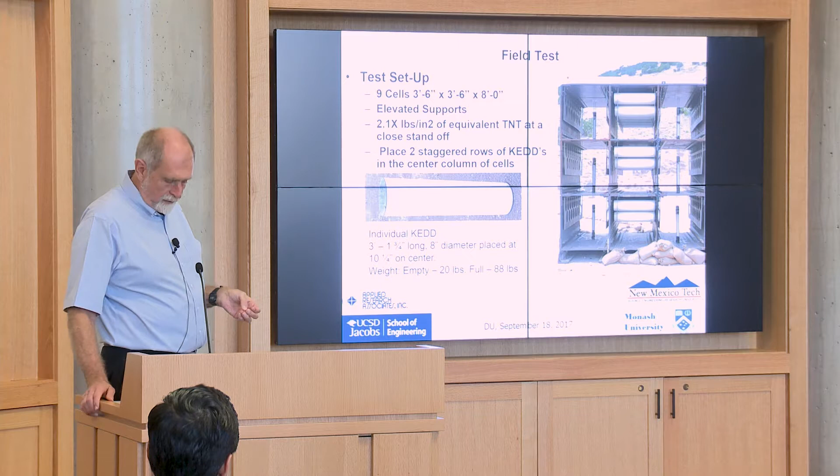This was done again in New Mexico at EMRTC, New Mexico Tech, where they have a big blast test area. You see a 9-cell mock-up, similar to what we have in a big bridge column tower. In the center cell, we put PVC tubes filled with water, these KEDDs, these kinetic energy defeat devices. Then we overlaid the whole thing with 2 or 3 inches of C4, plastic explosives.

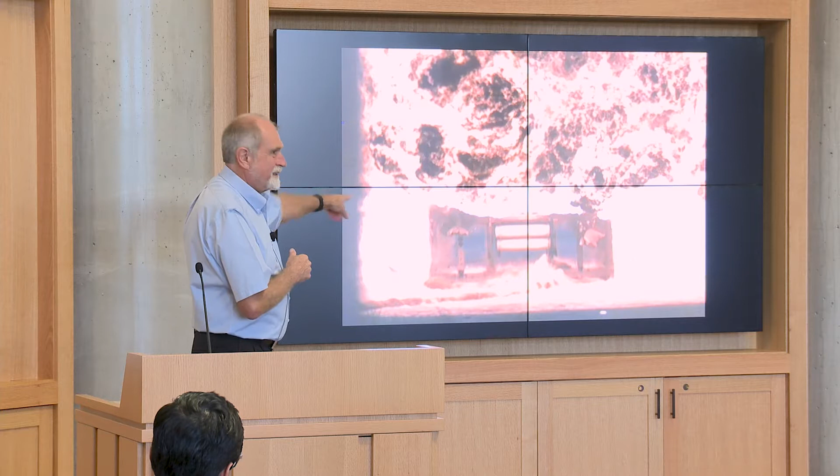Focus on the two outside cells now. You see the big fireball, and there you can see these flyer plates flying through. So for the very first time, you could actually see visually what happens on a cellular structure when real blast loads are applied. And the center cell is perfectly intact, okay, so no damage to the center cell.

So I cannot tell you exactly what we did to strengthen our bridge towers, I just show you some of the research we did in support of it. So anyways, I think I've talked enough. This is a little bit about designing for the known unknowns.

And I thank you for your attention, and I'll be more than happy to answer any questions.

When you design a bridge, those water tubes in there, how do you compensate for the extra weight? Oh, it's so little compared to the weight of the bridge. It's nothing.

Concrete bridges versus composite bridges, which one would tolerate a bigger blast? That's a question you'd be asking the composite people. Well, does anyone want to answer? Look, the answer is, in the end, if it's designed right, any bridge can withstand it. You saw that composites can be very useful in hardening existing structures, but we can design existing concrete structures from the beginning already in the right way. It's just that when we learned about these confinement effects in earthquakes first, and then in blast loads, that was after the '71 San Fernando earthquake in California, and already 75% of our bridges had been built.

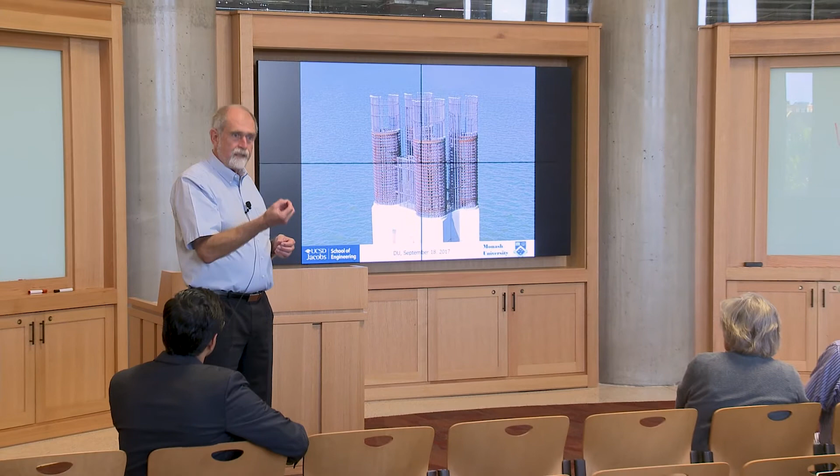I showed you that one picture of the Bay Bridge during construction of one of the concrete piers. Let me just pull it up again. You see, this is what typical columns look like now. In terms of what we call reinforcement ratio, that's the steel amount compared to the concrete volume, you have the same reinforcement ratio vertically as you have horizontally, typically 1% to 2%.

Well, the answer to that is still out, you know. We don't really know. We haven't opened any of these steel jackets yet, even though we've installed them now for over 20 years. So we don't really know what the concrete does inside that steel jacket. But it is grouted, you know. You put a jacket around, then you pump grout in to get a solid connection between the steel jacket and the concrete. And so there's really no reason why it should deteriorate. So the answer is probably yes, it can extend the service life.

So also these problems, you had to build a full-scale test fixture. What was the time frame for building those laboratories? Well, the best example is the SRMD test system where we tested big bearings. That system alone cost $15 million.

It was about a one-year design phase, another half year to build it. And since we had to control 13 servo-controlled hydraulic actuators simultaneously, it took us over two years to get control over that beast. So it can be a very long time frame. But when you think about an expenditure of over $16 billion to retrofit bridges, $15 million is just noise level.